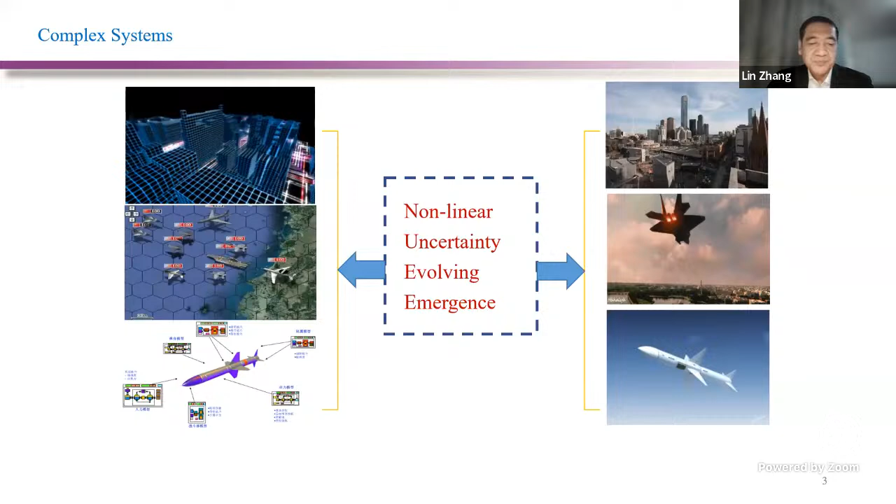In fact, it's not easy to give a definition of complex systems, but generally they have some important characteristics, such as strong nonlinearities, uncertainties, and complex relationships among the elements, and the elements and their associated relationships will continue to evolve, resulting in unpredictable phenomena that never manifested in the subsystems. Next one, please.

Okay. The development process of complex products is a very typical complex system. It's a kind of system of systems. For a complex product, such as automobiles, airplanes, ships, and engines, its structure is very complex, and it generally includes dozens or even hundreds of disciplines, such as the structure, the materials, pneumatics, fluids, electronics, electromagnetics, and so on. The structure of a product can be divided into different levels, such as the system level, subsystem level, equipment level, component level, and part level.

And the life cycle of a product is generally long. The phases include demand, analysis, design, manufacturing, experimental testing, sales, maintenance, and even destruction. Every phase may last a long time, and the system keeps evolving within the whole life cycle. The development of such complex products often requires a large number of units and departments to work together.

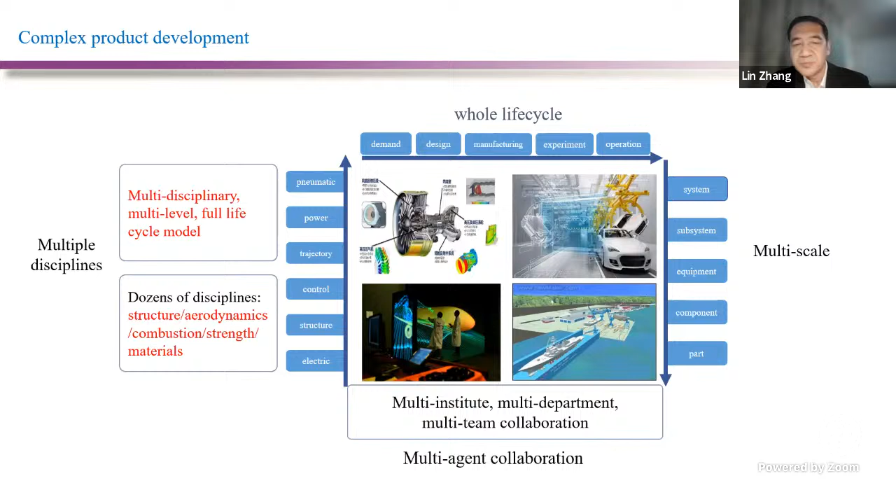It means sometimes the same terminology has different meanings in different domains, and different people from different departments may give different names for the same things. So this results in difficulty of communication with traditional documentation. And in the system integration stage, the right shoulder of the V model is mainly the assembly of the physical systems, making it very expensive and time-consuming to repeat trial and error.

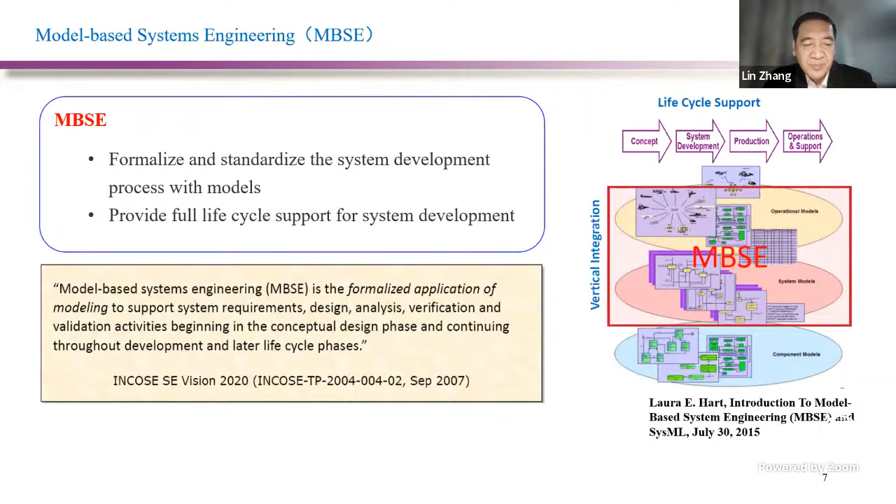Currently, the Systems Modeling Language, SysML for short, is the most frequently used modeling language for MBSE. It was developed by INCOSE and the OMG organization based on the Unified Modeling Language. UML is for software engineering. SysML adopts the main idea and methodology of UML. It's also a diagram-based modeling language. It took many elements from UML and added some new elements to support system development.

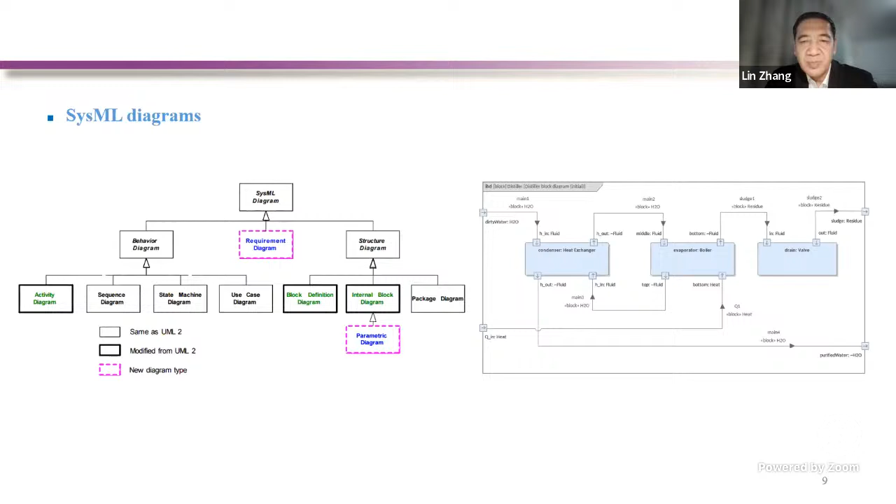In traditional systems engineering, different departments communicate with documentation, as mentioned before. They transfer documents from one department to another and discuss based on natural language in the documents. In MBSE, it's different. The transfer of documentation becomes the evolution of models. People of different departments discuss problems with models, especially when some problems occur. It's easier to find the reason with models than with documents.

This change is a very big change for engineers involved in development activities. So sometimes MBSE is considered a revolution of systems engineering. But so far, for the V model, only half of the problems have been solved. In the right shoulder of the model, if the system integration method is still based on physical prototypes, the efficiency will still be very low. It will be very time-consuming and expensive, and the limitations are still very big.

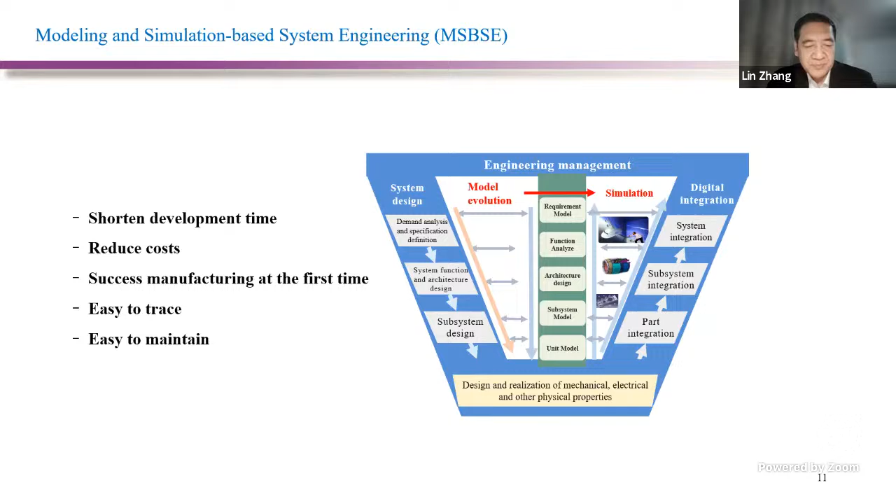The problems and the challenges. If you want to establish a system model that reflects the architecture and the physical features to perform simulation of the whole system, the SysML language is not enough to support the idea, the methodology of MBSE. So other languages have to be used to collaborate with SysML modeling tools. The conversion between SysML model and other kinds of simulation model, for example Modelica or Simulink, has to be done. And interface standards, such as FMI, have to be used to realize the integration of different software tools.

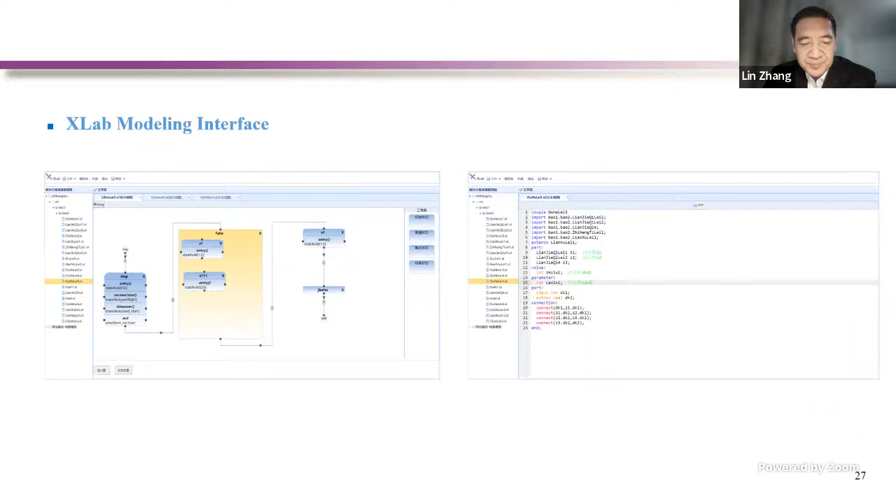So this is the interface of the XLab modeling environment. And actually, this software is online. So you have a link at the bottom of the slides. The next one, please.

Okay, so we have built a model library, because a model library is very important in modeling tools for engineers. Currently, the XLab model library includes more than 6,000 basic models of multiple disciplines, such as mechanics, electronics, control, hydraulics, and so on. Actually, we are still working on expanding the professional model library, and also working to further improve the professionalism of the XLab software.

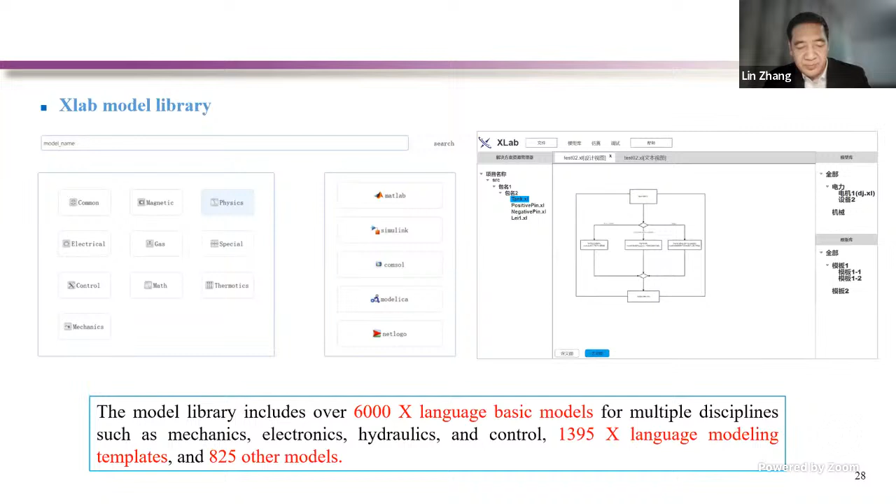Now, based on the X language and the toolset, we proposed a methodology for modeling and simulation-based systems engineering. So it gives the whole process of how to do the modeling and the simulation based on X language to finish the design, validation and verification of the system. The methodology we developed, we called it XSEM.

It means X language-based systems engineering methodology. It bridges the gap between system design and validation. And we can do validation by integrated simulation with one model. The transformation between SysML and Modelica or MATLAB Simulink is not needed anymore.

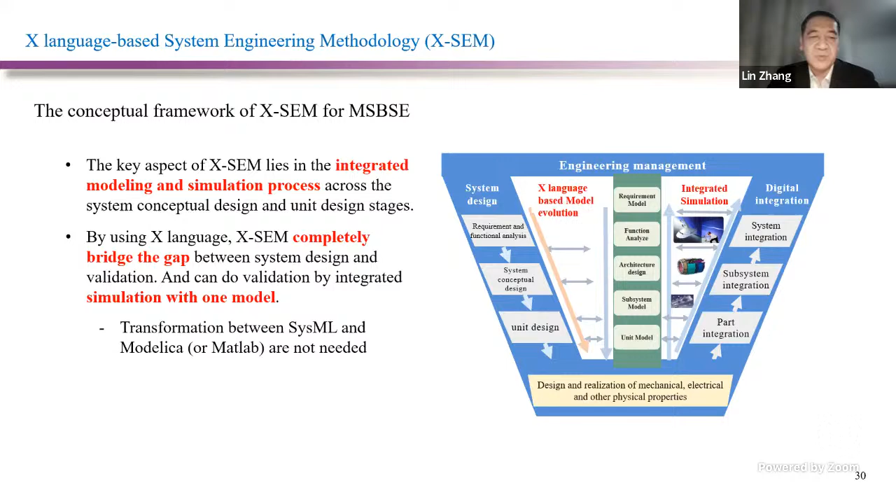Next one. Excuse me.

The next one, please. The process of modeling and simulation with X language is shown in this figure. The input file can be code or graphics. The code format can be directly sent to the compiler, and the graphics need to be converted into code and then processed by the compiler. After the compiler receives the modeling code, it translates the X language code to C++ code. The generated C++ code will be executed based on the simulator.

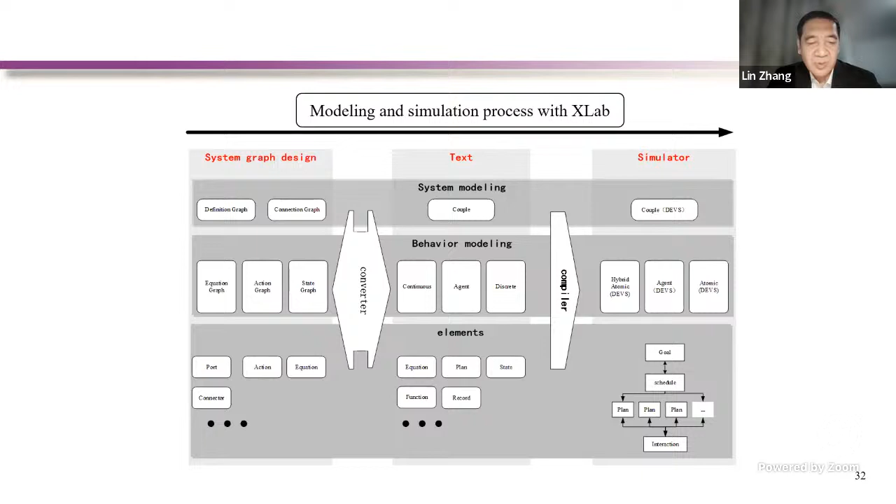Because sometimes enterprises or organizations have built many models with other kinds of languages, the XLab software tools also have the ability to integrate with other kinds of models built with other software tools.

Next one, please. There are some examples. It's a circuit system modeled by XLab. In the middle is the model in X language. The upper one is the graph model. The lower one is the text code. They are the same; they can be translated automatically with the tools. And here is the simulation result.

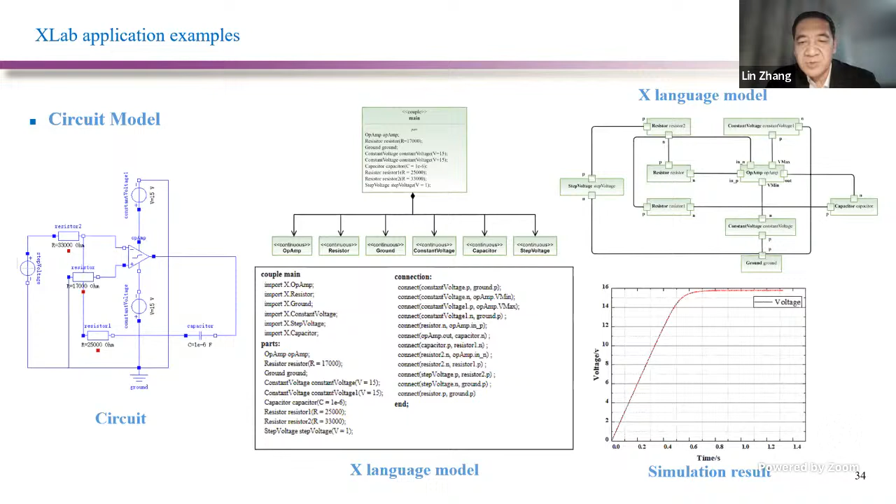Next one. This is the water tank model. It's often used to demonstrate control theories. Because the controller can be taken as an agent, we built this model with X language to build the agent part. Another example, next slide.

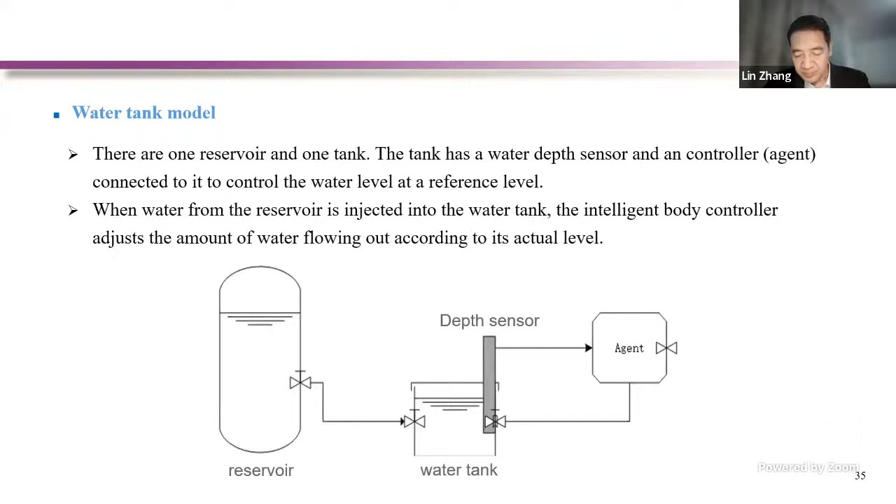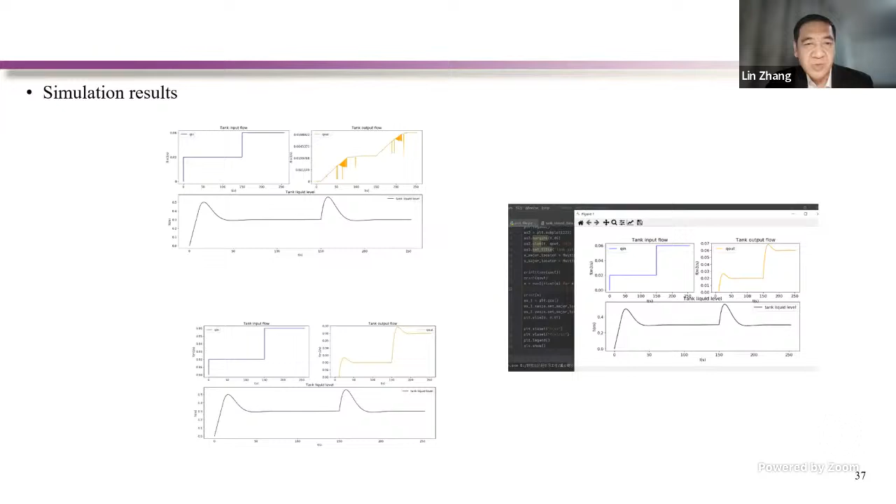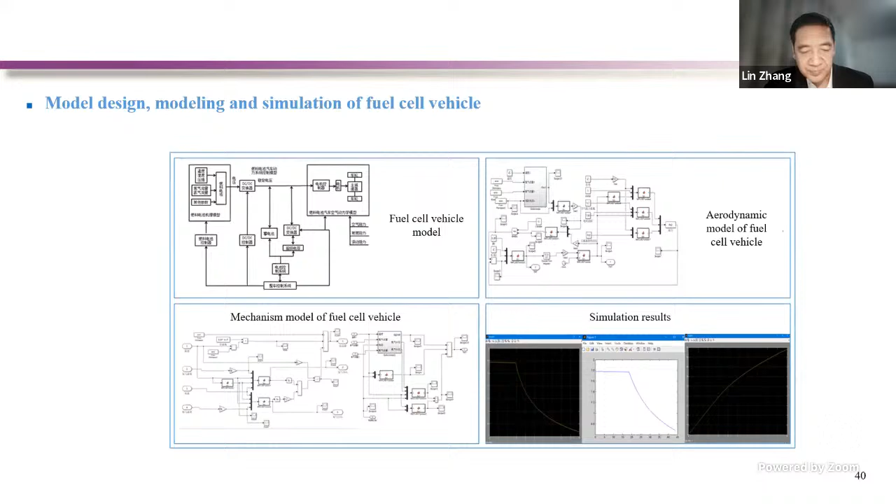Next one. Yeah, here is a little bit complicated example. We do the comparison of the two kinds of methodologies. First, we use the traditional method for the design and simulation of aircraft taking off, the process of aircraft taking off.

The current method is to analyze the requirements and the interaction logic of subsystems with SysML and get a system level model with SysML diagrams, to analyze the flight environment and flight dynamics properties with MATLAB and Simulink. FMU is used to connect the SysML model and the MATLAB model to conduct the whole system simulation.

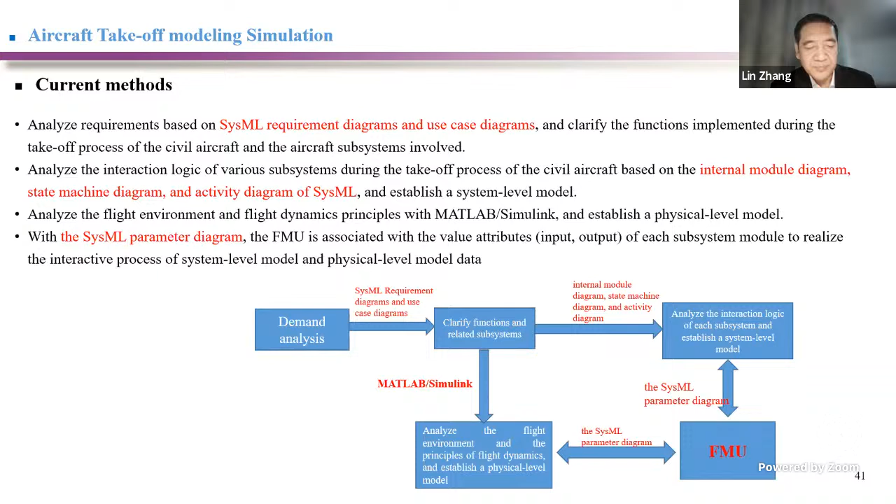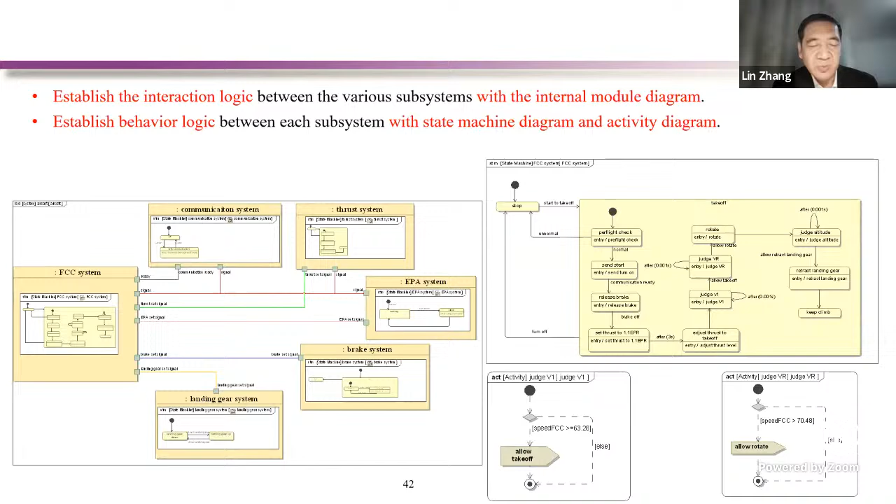Next one, please. This is the SysML model. It's the system architecture. And the next one is the MATLAB and Simulink model. The next one, please. Yeah, this is the Simulink model. We use MATLAB to build the dynamic model of the aircraft system.

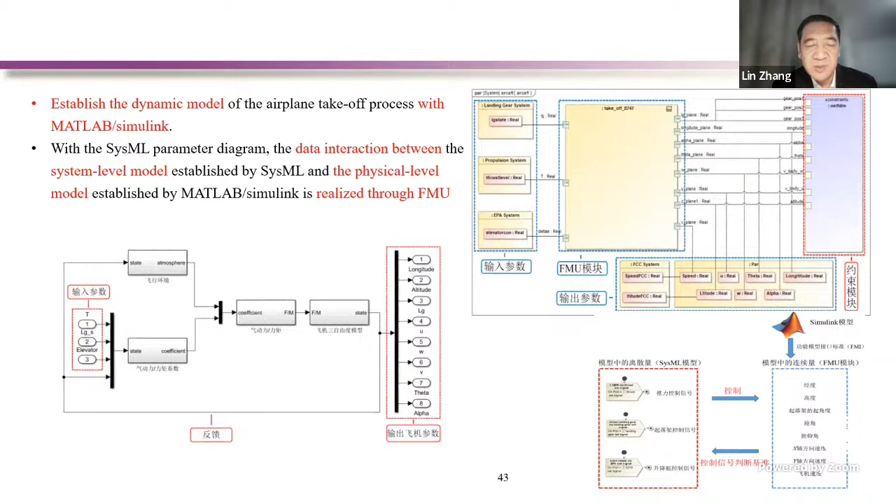So with the SysML parametric diagrams, the data interaction between the system level model and the physical level model is realized with the FMU. It's a kind of interface standard between different software. Many system simulation software tools support this kind of standard. Next one, please.

Now, we'll do the same thing with X language and XLab. So we don't have to build two models, the SysML model and the dynamic model, with two different software tools. We just build one model, and with one compiler and one simulator get a final simulation result automatically. Next one, please.

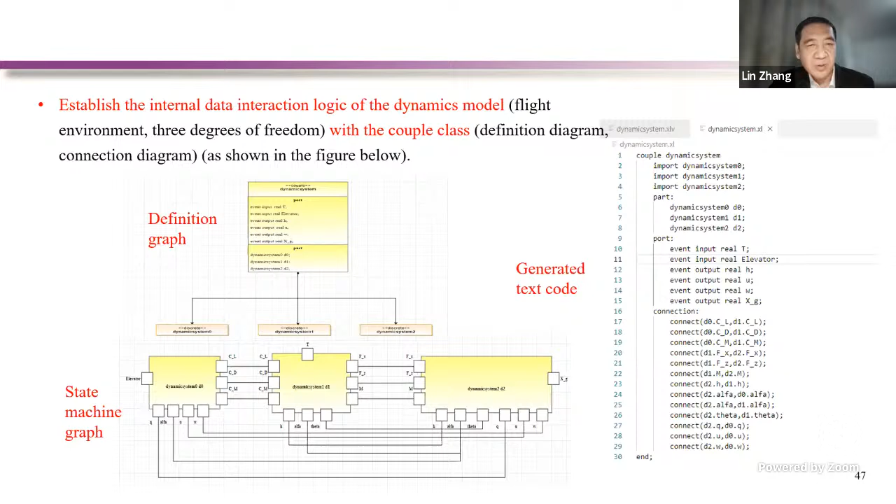So the simulation results compared with the traditional method are the same. Actually, the traditional method was done by another university's experts. So we cooperated, we borrowed the model and did the same thing, but with a different method, and got the same result. And the new method can improve the building efficiency.

And there are a lot of new features I mentioned many times, so we can do a lot of things. We can do the optimization of the whole system with one model and automatically. And actually, it's impossible to do this kind of optimization automatically when you use the traditional way with two models in two softwares. So now, next one, please.

Yes. So in summary, the advantage of the MBSE method based on X language: X language can realize the unified modeling process of system level structure and physical performance. It avoids the conversion from SysML to Modelica or Simulink or MATLAB, which may need tedious work on interface modeling. This kind of work has to be done manually by human engineers.

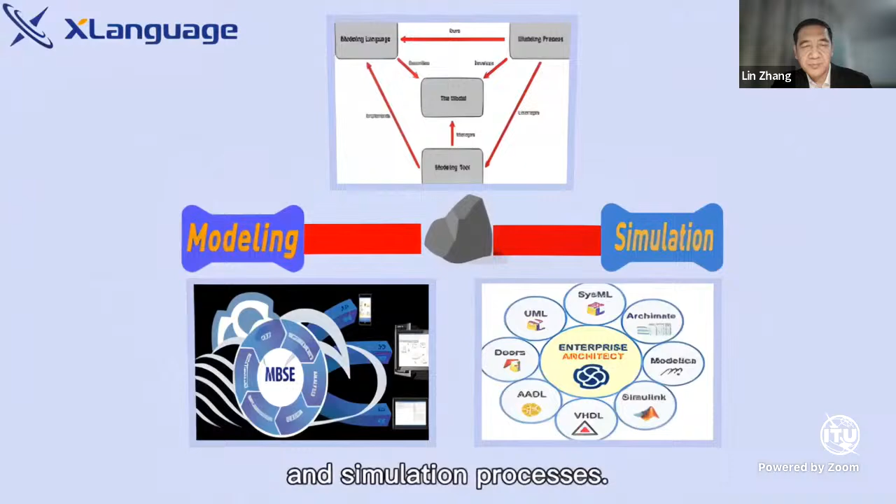However, existing MBSE languages, methodologies, and software tools have inherent flaws that lack capability for whole-process collaborative design and simulation, making it difficult to ensure the consistency between various parts of a system and the traceability of the modeling and simulation processes. The X language, together with the corresponding methodology and software, is a new MBSE technology system developed by Beihang University, which integrates a variety of modeling theories and specifications, fundamentally solving the existing MBSE's problem of disconnection between design modeling and simulation validation.

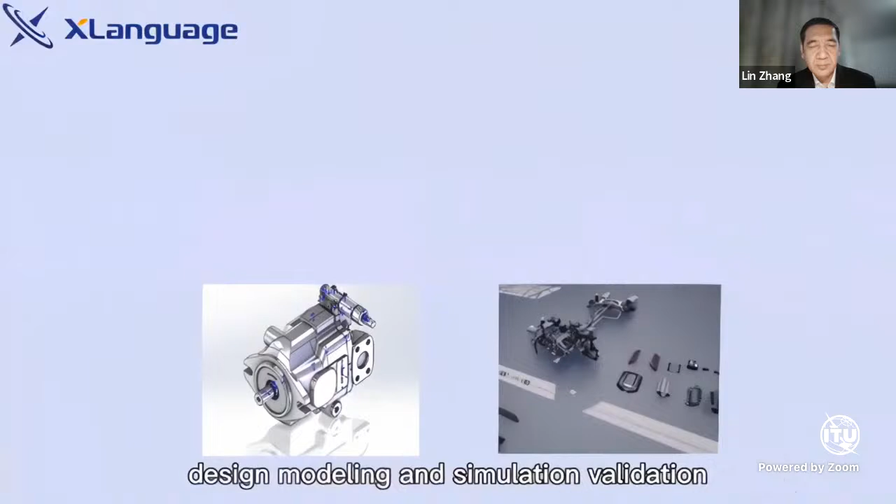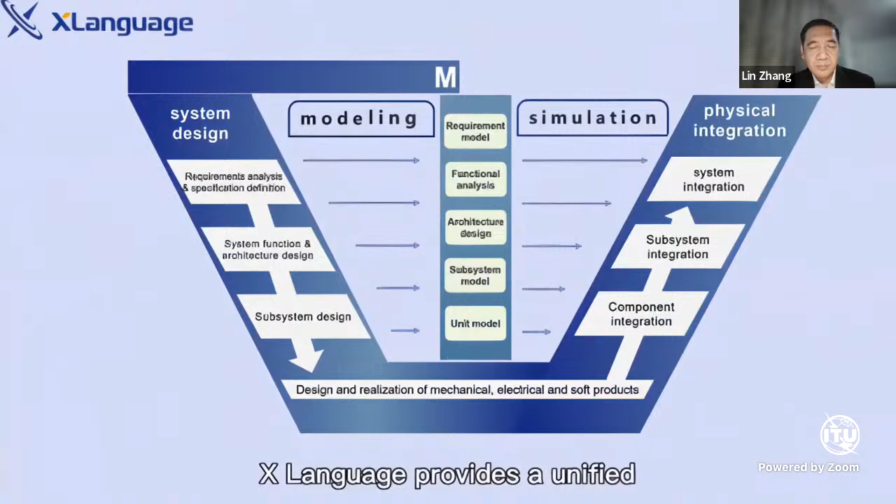The X language provides two modeling syntaxes, graph and text, with consistent meta models. On this basis, X language provides a unified formal modeling specification for conceptual design, system architecture, and physical behaviors, and supports hybrid modeling and collaborative simulation of continuous systems, discrete event systems, and intelligent systems, which guarantees seamless integration at all stages of system development, improves the traceability of the whole modeling and simulation processes of the system, and helps R&D teams to achieve comprehensive and efficient information exchange, sharing, and reuse.

The X language can be applied to systems engineering and system of systems engineering in a variety of fields, such as aerospace, shipbuilding, automobile, electric power, electronics, communication, and networks. Whether designing complex flight control systems or developing innovative intelligent transportation systems, X language can provide engineers with powerful modeling and simulation tools to support their decision-making and validation throughout the entire process.

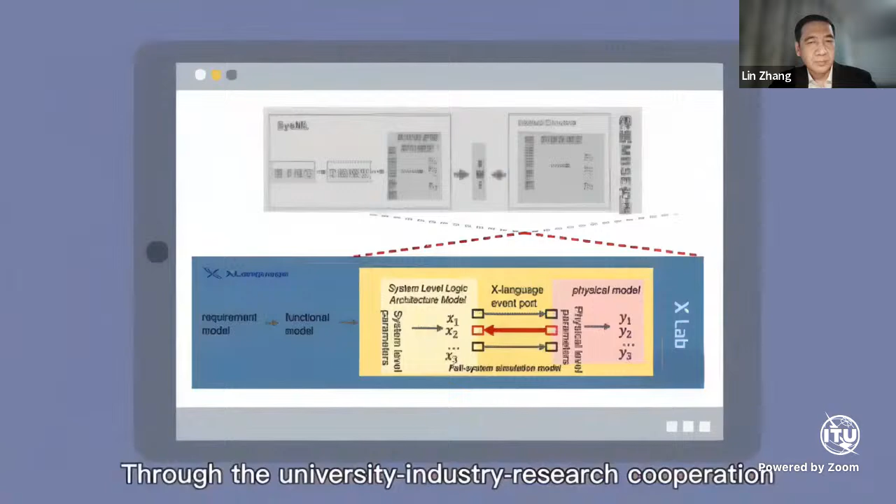X language, with its mission of breakthroughs and innovation, brings new experiences and more possibilities to system engineers. Through university-industry research cooperation, an ever-improving and mature X language technology system will play an active role in improving the efficiency of design and development of complex systems and supporting original innovation. That's the end of the presentation.

I'm sorry, because of the throat problem the speech is not very smooth.

Thank you very much, Professor Zhang. It's really a comprehensive keynote presentation. You covered quite a lot of materials and we need some time to digest those materials. So in your talk, you mentioned traditional system engineering and also introduced the basics of model-based system engineering compared with modeling and simulation-based system engineering. You actually introduced your own language for modeling and simulation called X language. So this is a very logical and systematic way to make a presentation.